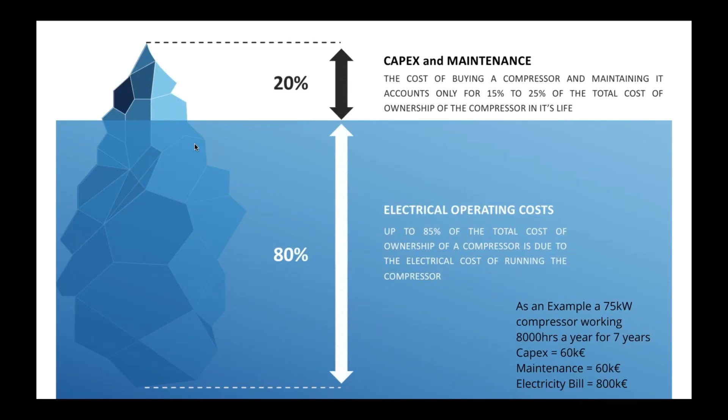The submerged part of the iceberg, the larger part of the iceberg that you can see here, this is the real issue, and it's typically how much it costs you to run that machine, okay, in terms of energy bill. So as an example, a very high-level example, a 75 kilowatt compressor, quite a large machine, medium to large machine. If this compressor works constantly, 8,000 hours a year for 7 years, we can estimate that buying it is going to cost you 60,000.

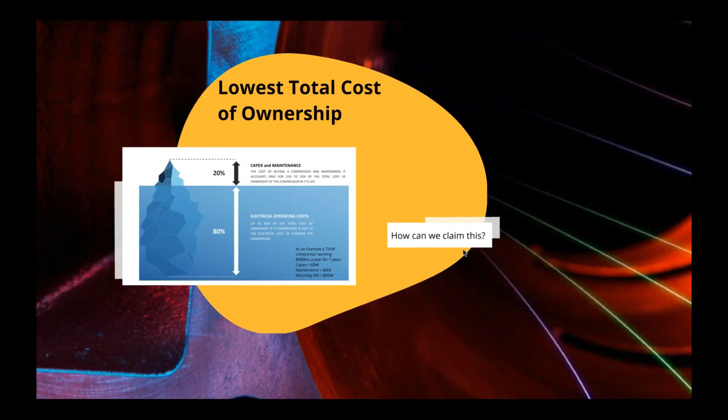Maintaining it is going to cost you the same amount over the 7 years. And then finally, the electricity bill is going to be 10 times more expensive than these, at 800,000 euros. This is using 20 cents per kilowatt hour. So this gives you a feeling of how important total cost of ownership is. But let's look at the question, how can we claim this? What are the basics around us as rotary vane manufacturers to claim something like that?

So before we start that, let's look at the basis of air compressors. A very simple slide here explaining how the world of compressors is defined. On one side, we have the dynamic compressors. Dynamic compressors, axial, centrifugal, all sorts of other compressors. These are typically high-speed impellers or turbines which give pressure to the air that goes through them, mostly via kinetic energy. In our side of the business, we are into the volumetric compressor.

So a volume of air is trapped mechanically by machinery. Then this volume of air is squeezed, compressed until the pressure rises from atmospheric pressure to delivery pressure. The most common type of volumetric compressor that all of us know is the reciprocating or piston compressor. If you have ever pumped up your bicycle tire, that is a piston compressor. Very simple machine. You pull out the handle, it sucks the air in. You push the handle, it compresses the air into your tire, right?

On the other hand, the world had to move to a rotating style of volumetric compressor because the piston compressors were getting too large and too expensive for the requirements of the industry. And what happened in the 50s and 60s, most of the world moved from piston to rotary, and the screw compressor became the go-to item in terms of rotary compressor. There are many other volumetric rotary compressors out there. We won't go through them, but the vane compressor sits exactly in the same category as the screw compressor.

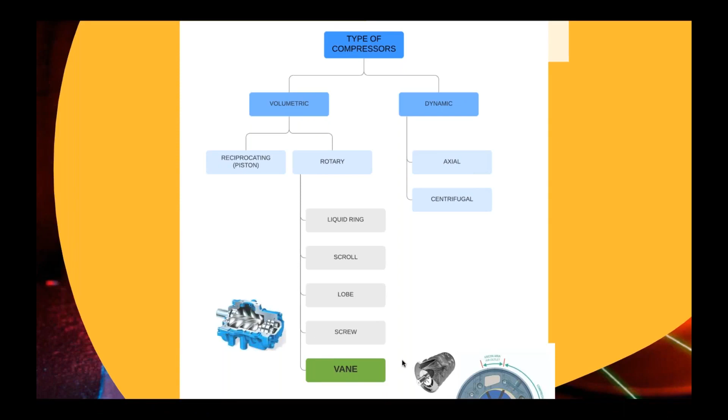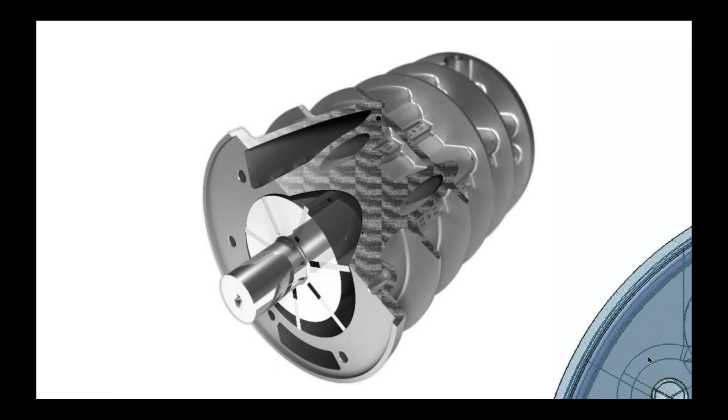So let's take a closer look at how this compressor actually works, the working principle. You can see here, this is a 3D image of our compressor. We have a stator, which does not move, as the word implies. We have the rotor, which turns, and we have the blades, which go in and out of the slots. Okay. It's a very simple working principle. This is a cutout, a cross section of the compressor itself. In this case, the rotor is rotating anti-clockwise.

The blades are pushed outside onto the stator via a simple centrifugal force. There are no springs, no mechanisms. They are free to move. And as soon as this rotor starts rotating, you will get the blade flinging out into the chamber. This is an intake port. You can imagine these blades moving. You can see the volume here is small. As it moves, it becomes bigger. That making it bigger sucks the air in from the intake. As it closes, you have the maximum volume. As it goes around, it becomes smaller and smaller until it hits the delivery port at the right pressure.

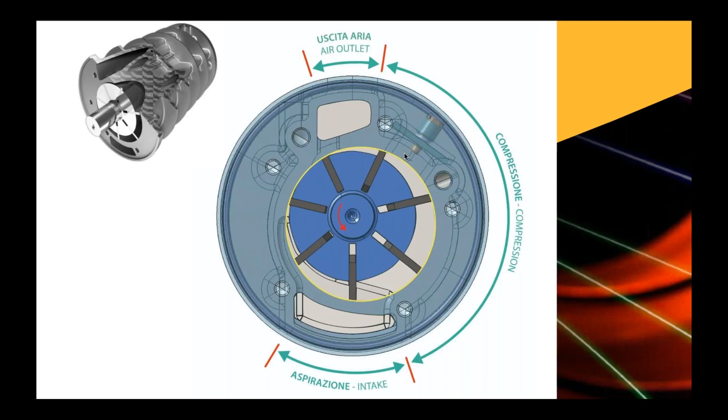Somewhere along this compression, there is an injection. In this diagram, it's a simple, straightforward injection from the stator. We'll talk about oil injection later. That's why I'm mentioning it. But as you can see, a very simple working principle. The difficulty in designing and making this machine work, you will understand through the webinar, is all about the tolerances. It's all about the engineering and the know-how that goes in it.

Okay. So let's start looking at the facts that make us so unique that we can make this claim in the industry. And one of the most important is all about the blades. So I like to call them infinite life blades, and you'll understand why. There's a bit of misconception in the world about rotary vane compressors, and this starts usually around the fact that the blades wear out and then they need changing. So why would I want to buy a rotary vane compressor instead of a screw? Well, the truth couldn't be further from that.

Everything in our compressor is made of a proprietary blend of cast iron. This diagram shows the blade, the stator, and the rotor. These three blends are slightly different. They have slightly different hardnesses. It's a real tribological marvel, which I'll go into in that other webinar in depth. But what happens here is obviously exaggerated. This is the oil film, this is the head of the blade, and there's absolutely zero contact between stator wall and blade head. This machine would never work if there was metal to metal contact. It would only work for a few seconds and the whole thing would be absolutely welded together.

This is an exaggerated diagram. In reality, this thin film of oil, which does all the carrying, all the pushing back of this blade, is actually the width of a human hair, 7 to 30 microns. Extremely, extremely thin.

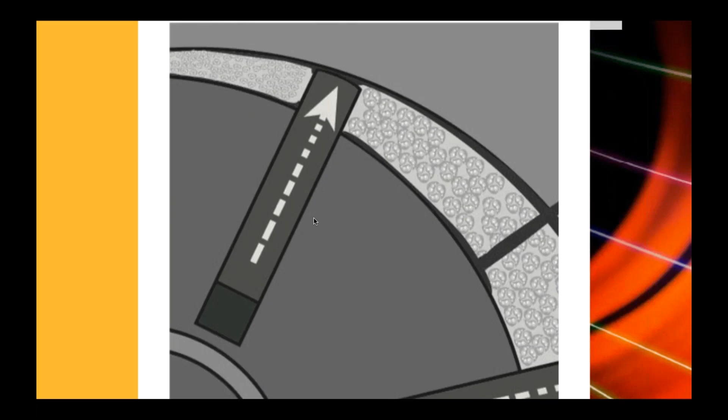But because of hydrodynamic lubrication, it manages to do the job beautifully. Where is there metal to metal contact in the compressor? There is metal to metal contact on the side of the blade, but this actually is one of our unique points, which we will touch on later, and you'll see how amazing this effect is on the overall compressor.

To give you an example, I'm going to use here a beautiful case study that was sent to us by one of our very long-standing and good clients up in Belgium. We have one of our old machines. You can see the design is very retro looking. This machine has worked non-stop for 30 years. It was put in service in 1990, and it was recently removed from service for no reason except to upgrade the client with a more efficient compressor from Mattei.

The amazing thing, these are the blades that have done the 30 years, 217,000 hours. You can see these were measured by the distributor, by our client, 42.85 millimeters in height. The 0-hour blades, these are straight out of our machining centers, 42.85 millimeters, again measured by the distributor. This is pure magic. A compressor that can work non-stop for 30 years in any environment. You can see here, maybe it's not even the cleanest of environments, is really something to be proud of.

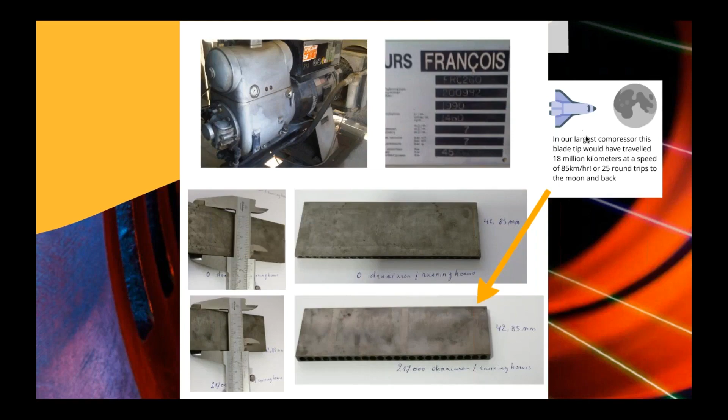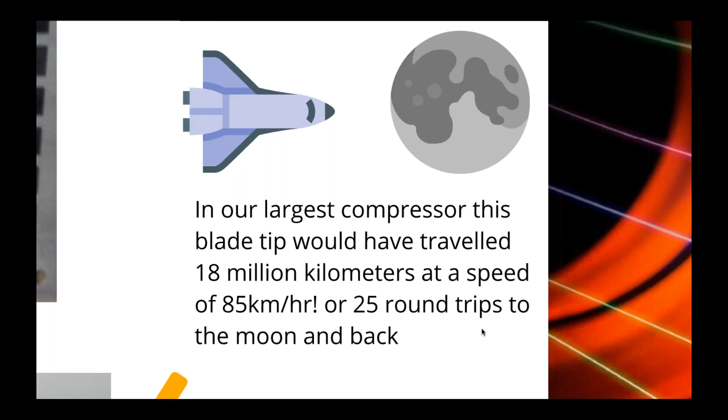So let me put it in terms that we might all understand. Some people don't know what 30 years feel like because they're lucky enough to be very young. So let's look at it in other numbers. The blade tip has traveled 18 million kilometers at a fixed speed of 85 kilometers an hour. Okay, that's 25 round trips to the moon, just to give you a little bit of frame of reference. So when I talk about infinite life blades, we mean infinite life blades. These do not need to be changed ever.

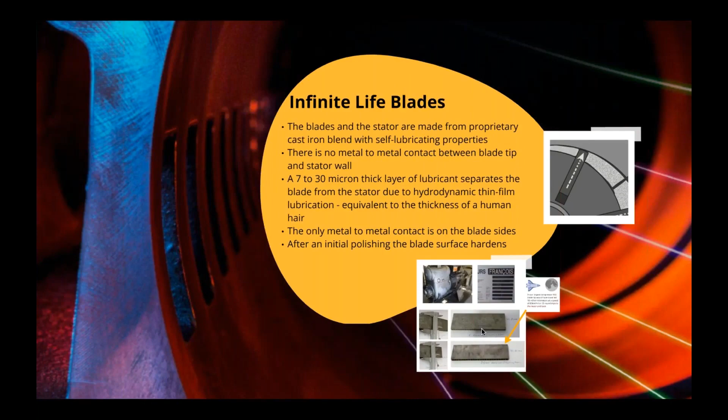Okay, let's look at the bearings. Any of you who work in the compressed air sector and know screw compressors, you know how important the whole discussion around bearings is. In a screw compressor, the bearings play a vital role. They keep the tolerances, they keep the rotors apart, they help with the axial thrust. And these bearings, unfortunately, at a certain point in the life of the compressor, need substitution. The bearing housing needs remachining.

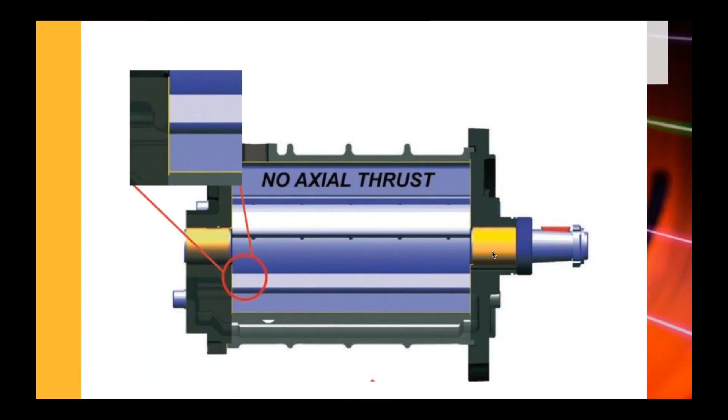Well, the beauty of the rotary vane compressor is we don't have any bearings. We don't need axial thrust bearings because there's no axial thrust. The machine is 100% balanced. The pressure profile between one end and the other end over the axis doesn't have any pressure difference, so we can get away with putting two simple oil lubricated bushes, these items over here. As long as there's an oil feed to these bushes, there is absolutely no necessity to substitute these bushes ever.

Okay, there again, misconception in the industry. Even our clients who go from screw to rotary vane end up thinking that after 5 years they need to change these items out. Well, this is really something that we keep trying to tell them to avoid at all costs because of what it could do to the compressor.

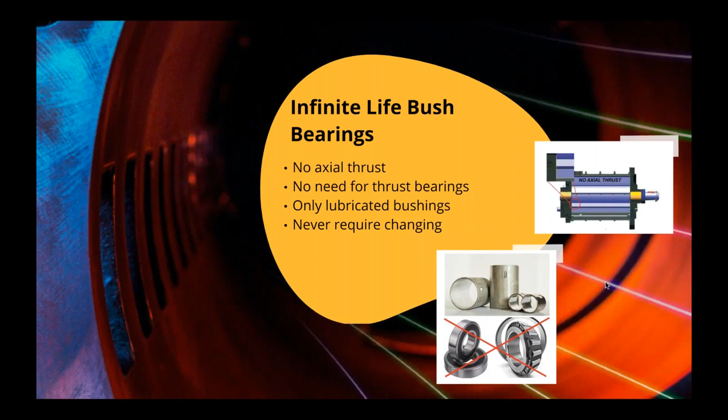Okay, moving on. So I've spoken now about blades and bearings. You can understand this is pure mechanics. These are items that don't wear. So we're touching more the maintenance and reliability side of the total cost of ownership. Now let's move towards what actually makes us lower our energy profile, so much so that we can claim lowest total cost of ownership. Starting with the slow speeds. The slow speeds are unique to the rotary vane compressor. Why is this? Again, it's purely down to the design, the way the machine works.

What we can afford to do with a rotary vane compressor, because we have 100% sealing between the highest pressure and the lowest pressure in the machine, we can bring that rotating speed down and we don't lose any volumetric efficiency. On the contrary, when you're dealing with a screw compressor, there is an intrinsic leakage internally between the high pressure and the low pressure. This leakage has even got a name. It's that common. It's called a blowhole. So once you have that fixed leakage, if you lower the speed of the rotors, that leakage becomes predominant and you lose volumetric efficiency.

So very important point. We can afford to lower the speed of the machines, and in lowering the speed, high volumetric efficiency, but much less wasted energy due to friction, heat generation, noise, vibration and everything else that comes with it. So we're the only manufacturers of compressors that can drop our rotating operating speed below 1,000 RPM for the operating life of the compressor.

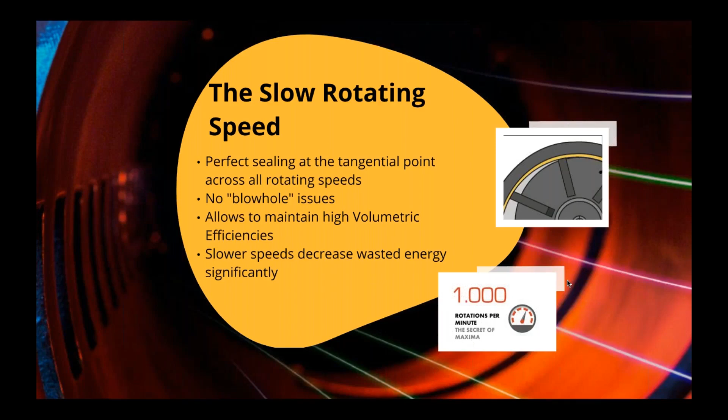Let's look at the cooling. Cooling affects the thermodynamics of the compressor. Many of you may know that the biggest part of wasted energy in compressing air goes away in heat during the compression phase. So the holy grail of compressor manufacturers is to keep that compression chamber as cool as possible.

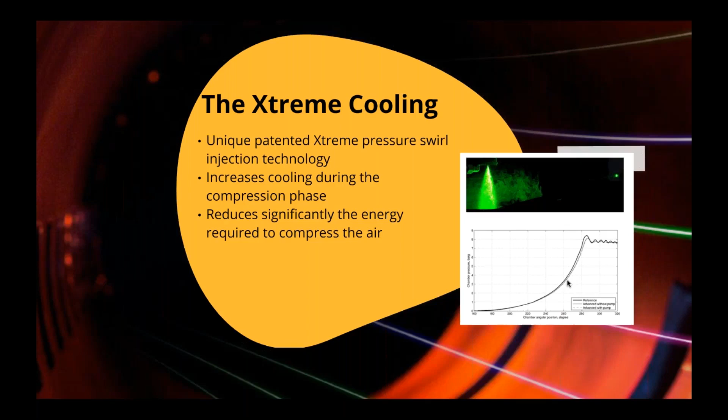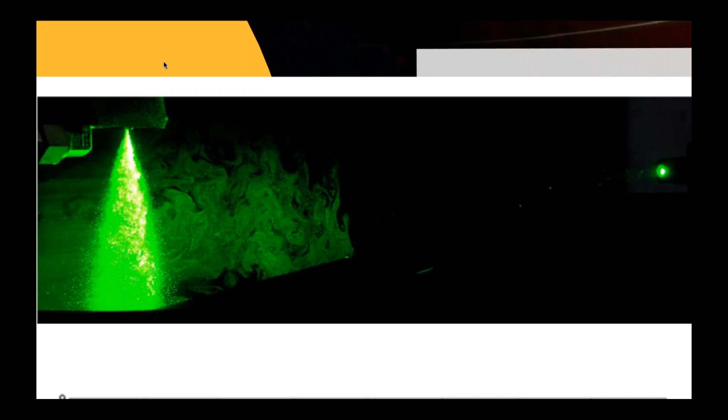Again, our intrinsic design allowed us to adopt a technology that is quite widespread in the automotive industry. It's called pressure swirl injectors. This technology allows whatever you're injecting to be dispersed into billions of microparticles, adding an order of magnitude to the thermal exchange between the air and the oil, and the air is what you're trying to keep cool.

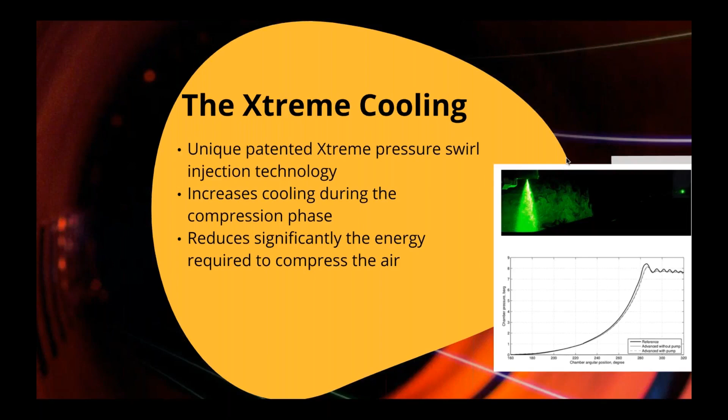We did this in conjunction with the University of Milano and the injector manufacturers. We patented this technology. We call it Xtreme injection, and we're the only ones in the field that can actually have an effective inner cooling, inside the chamber cooling effect. This significantly decreases the energy spent for the compression phase itself.

And here, finally, another point that is extremely important to understand. We're the only manufacturers of a machine that actually improves the more you use it. This is something that sounds like nonsense, to be honest, but for over the decades, the Mattei team has known this. Our good distributors have always known this. Our clients that have always been loyal to us over the decades have known this. It was about time that we took some third-party certification around what we kept telling our clients, which sounded so surreal that one could understand why they wouldn't believe us.

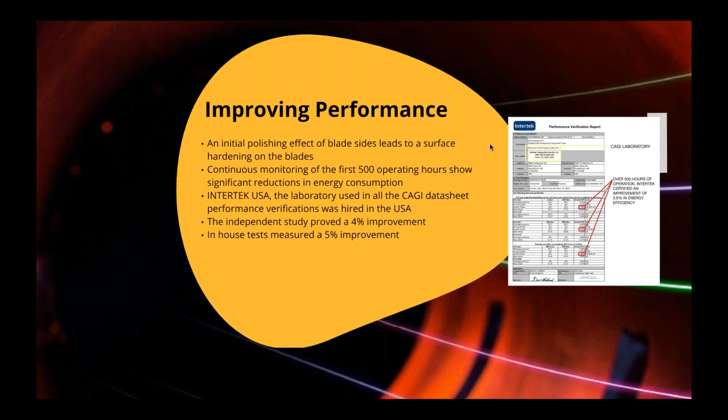So what did we do? This was a very interesting test. We took a 55 kilowatt machine, one of those slow machines, the 1000 RPM machines. We sent it to Intertek for a validation test. Now, Intertek is the same laboratory that CAGI, the Compressed Air and Gas Institute in the USA, uses to independently verify the performances of compressors declared by compressor manufacturers.

Okay, CAGI is an institution. Most of us who work in the compressed air industry know CAGI. We've been part of CAGI for many years. Now, CAGI uses Intertek. We said, okay, let's go straight to Intertek. Donald over here and Klint over here, they are the people who test all the other compressors for CAGI.

What did they find out with this test? It was a continuous monitoring test for 500 hours. What does that mean? They took the machine from us at 0 hours, they tested it at 0 hours, they ran it continuously in the laboratory. It was a pretty expensive test for 500 hours, and then at intervals of 100 hours each, they measured the performance.

They measured 1% improvement after 100 hours, another percent improvement after 100 hours, and another 1.6% improvement between 200 and 500 hours. You see there it's flattening. The curve is flattening there at the end of the 500 hours. They proved that this machine improves in its own energy efficiency. The kilowatts actually drop in front of your eyes to compress the same amount of air, to the tune of 3.8% in 500 hours. In the laboratory, for a larger machine, we measured up to 5%.

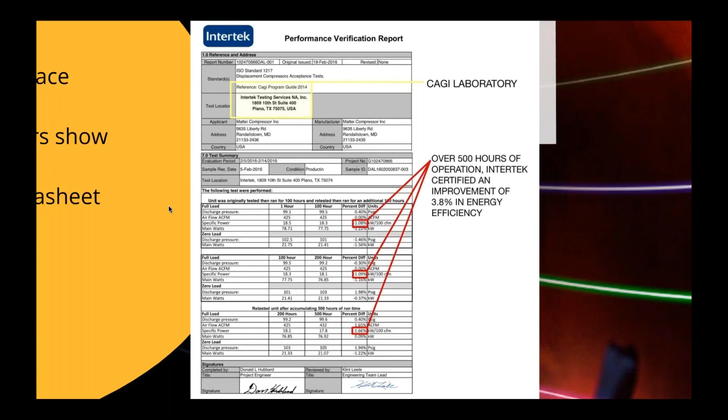But why is this possible? How is this possible? This really defies all knowledge regarding industrial compressors, especially screw compressors. But we do understand why it's possible. Remember that polishing effect that I was mentioning on the side of the blade? Well, as that blade gets polished, as those first 500 hours go by, that blade surface hardens, the friction coefficient gets lower, and we manage to save more kilowatts throughout the machine.

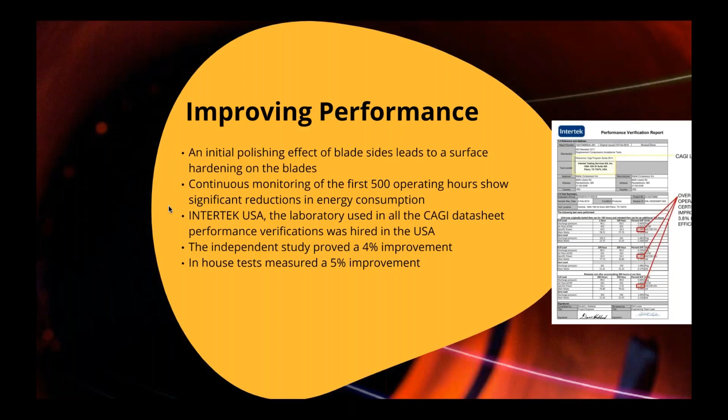So imagine a machine that's got bigger blades, bigger kilowatts wasted in friction. We are going to be running tests like this one on the larger machines soon, but we assume, or rather we are convinced, that the performance increase will be even more important on the larger machines, even beating the 5% improvement. So again, this is certified performance improvement over time.

So finally, now that we've gone through all of this path of discovery, let me call it, how can we actually claim lowest total cost of ownership? Well, let's take it one part at a time. Let's look at the blades and the bearings that give us a so-called infinite life air end. Does that lower the maintenance cost of the machine?

It definitely does. If you take into account the fact that every 4 to 5 years you need to overhaul a screw air compressor, and every 4 to 5 years you don't need to overhaul a Mattei air end, a rotary vane air end, well, you can understand that over the course of 30 years you are saving 3, 4, 5, 6 overhauls, depending on the number of hours that the compressor has done, and those are big bucks in our business. They're such big bucks, these overhauls, that most of the time the client gets convinced to trash the 5-year-old machine and buy a new one.

Well, this type of revolving spending, it's not the mission, it's not our core. At our core, we want our clients to enjoy our product for as many years as possible, keep maintaining it properly, and the customer should be happy. He should forget he has a compressor. He shouldn't remember every 4 to 5 years that he's going to need an overhaul sooner or later, or the whole thing will break down.

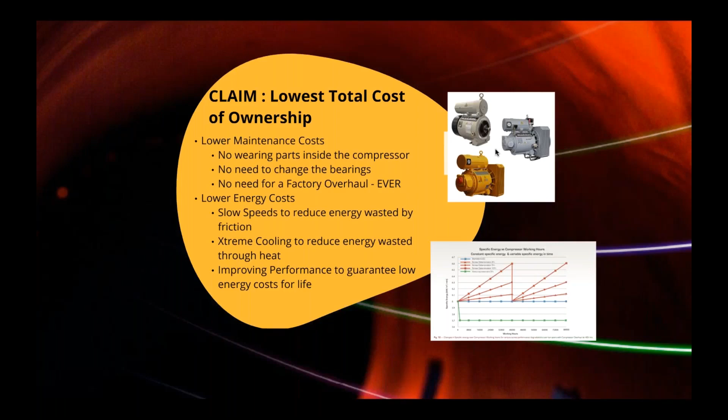For those of you who don't know, Mattei compresses more things than just air. This is an air end for air. This is an air end for gas. We do all sorts of gases: biogas, methane, sweet, sour gas. We've got a lot of gas applications, which is a trending field right now. And also, this is our compressor dedicated for the brake systems in the rail industry.

The rail industry has turned out to be one of the sectors that desires this type of long life and reliability more than anybody else that we have come across over the years. We've been selling to the rail industry as aftermarket, as retrofits for many years, and now the tier ones are in such need of different technology from what is currently being used. They have asked us to get IRIS certified, and in February this year we were certified IRIS. If you know what it is, it's the International Railway Supplier Certification. Very difficult to attain. So that is with regards to reliability and maintenance costs.

But let's look at the energy costs again. Those points that we spoke about: slower speeds reduce energy wasted for friction, but also it adds reliability. You can understand a compressor rotating at 7,000-8,000 RPM, 3,000 RPM, even 1,500 RPM, versus something that rotates slowly over time. Everything gets more reliable.

Extreme cooling, the pressure swirl injectors that we spoke about, these reduce drastically the energy wasted through heat of compression. This is the #1 killer with regards to the wasted energy of an air compressor. Whoever will be able to go close to isothermal will have the perfect machine, which is impossible, unfortunately, but we're trying to get there.

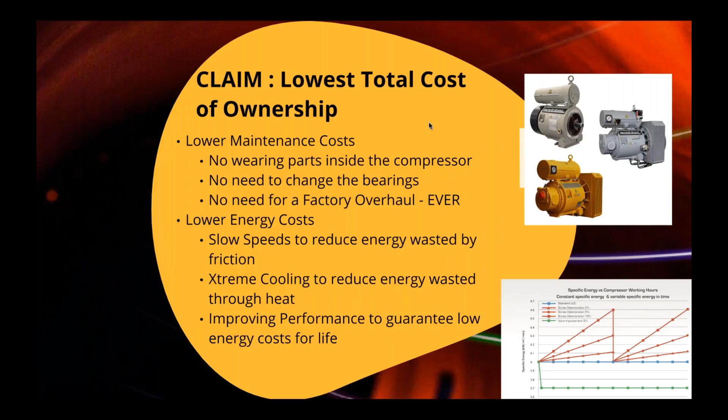And then finally, the improving performance, the certified improving performance over the first 500 hours. This is absolutely groundbreaking stuff. No other machine is going to be measured over the first 500 hours, and you'll discover that there's an actual improvement in performance. So can we claim lowest total cost of ownership? Of course we can. The machine gets better over time and then gets stable.

This is a little teaser that will be the basis of a whole new webinar, another 30-minute webinar that I'll be making soon. In this teaser, we are adding a little bit of information. Hey, if we need to change those bearings out, if we need the overhaul on the screw compressor, does that mean that screw compressor performance drops over time? Of course it means that, because the screw compressor performance is linked to the tolerances of those bearings. It's linked to the machining of those bearing houses, all right? And that's why you need to change at a certain point.

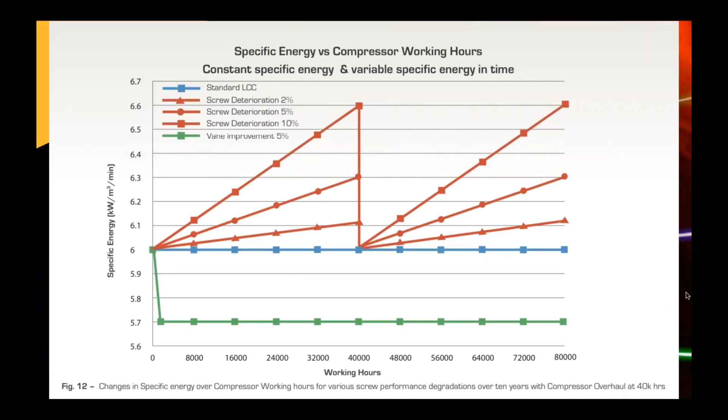You start putting in that difference, 2%, 5%, 10% deterioration over 40,000 hours, and the gap is huge. The gap is huge. And look at that, they're both starting at the same 0-hour energy efficiency. All right, but this is a teaser. I'm not going to go into this, and I hope that you'll be joining me soon for this webinar.